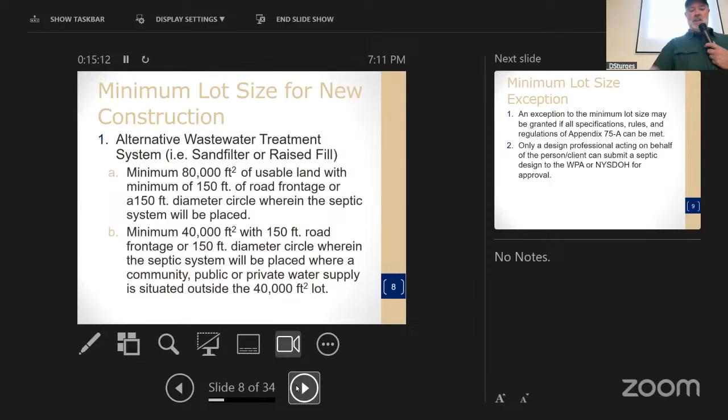The minimum lot size for one of these systems is 80,000 square feet, which is just shy of 2 acres. Say, for instance, you had a water source on the property, like a well. If you have a water source off the property, you don't have to contend with separation from wells, and that's 40,000 square feet.

We also have a minimum lot size exception. So if you can't meet Appendix 75A of the State Sanitary Code, which is basically the rules the state set forth for septic design and regs, and how they're put in, what you can do is hire your own engineer, and if they can meet the 75A standards, then we'll allow the septic to go in.

One thing I'll also mention is, say for instance you had really good perking soil, you could do a conventional septic system, which is like a standard leach field, built with soils like sands and gravels. You have those square footages I mentioned earlier: 40,000 square feet for a well on the property, and 20,000 if you had public water, or a well on an adjacent property.

The replacement septic system sequence is basically the same as new construction, except a lot of times on replacement systems you can't meet all of the 75A standard, meaning separation distance, because there's already existing wells and buildings and so forth. So you do the best with what you have to work with. You try to meet all the separation distances if you can, but typically if you can't, you try to get the septic far enough away from a well. You can also use other alternatives, which I'll talk about in a little bit.

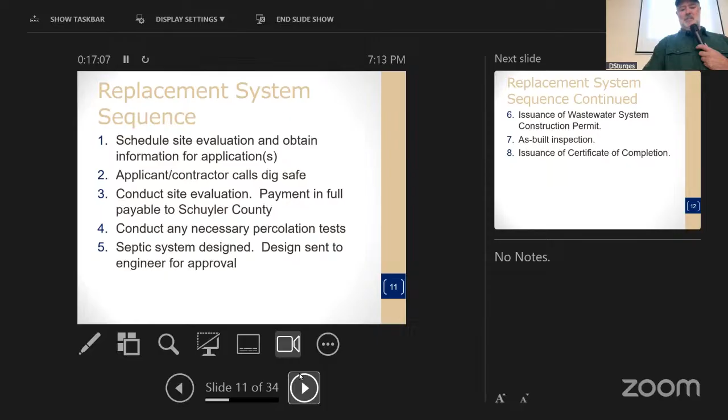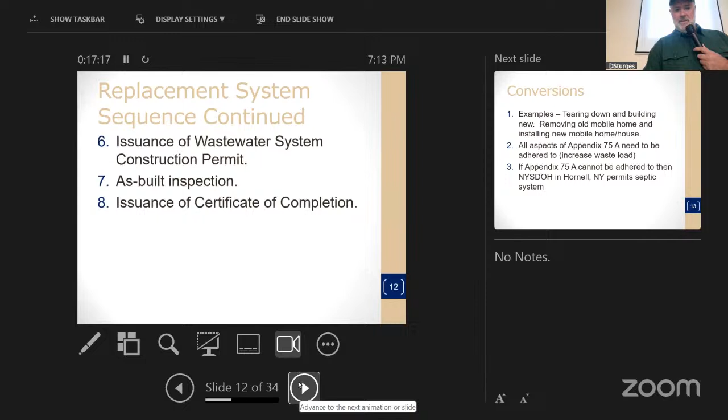So I mentioned earlier, conversions are examples of tearing down a building and building a new place, removing an old mobile home and installing a new mobile home or house. All the aspects of 75A need to be adhered to. If you're increasing the waste load and Appendix 75A cannot be adhered to, then the DOH at Hornell has to permit the septic system. It's out of our hands, we can't permit it.

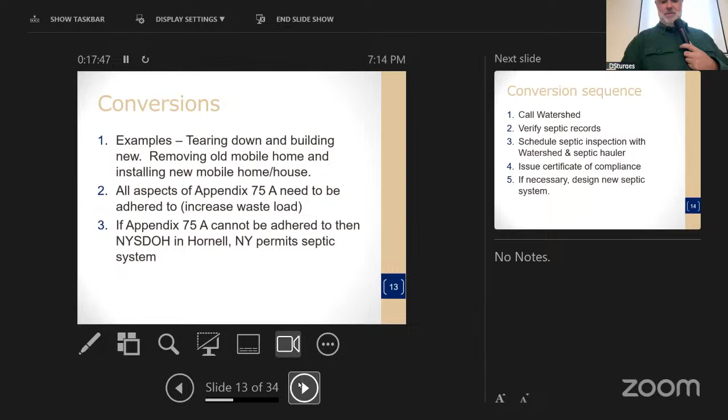Conversion sequences are kind of similar. You call our office, we'll verify the septic records to make sure what's there for the septic system fits their project. So say for instance we designed a 3-bedroom septic system prior to this tear down. It's already existing. If they're putting a new 3-bedroom in, that's like for like, so you're not increasing the waste load, but we do have to inspect that septic to make sure it's functioning.

That's why you get a hold of your septic hauler, and I'll meet them out there to pump the tank out and also look at the septic system to make sure it's functioning okay. Then I'll give a certificate of compliance, and I'll send a copy over to Jason so he knows the septic's good to go for the new building.

So campers and RVs, we get a lot of questions about those. We do allow a holding tank to be put in, for the simple fact that a camper is not considered a permanent structure. If they have it registered through the DMV as a movable object, then we do allow them to have a holding tank, and we permit the holding tank if it's put in the ground, and they have to make sure it's functioning and so forth.

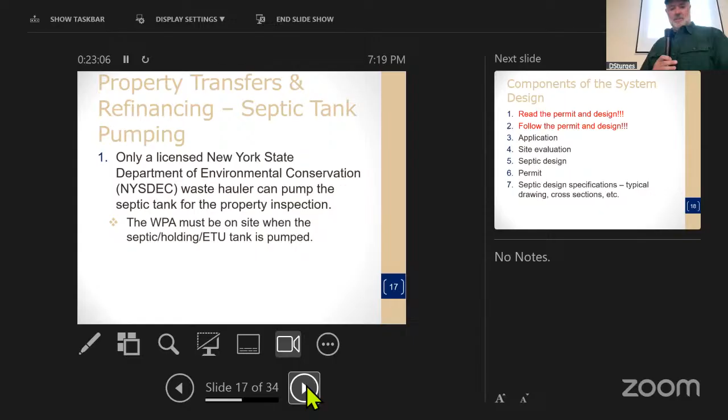So here's some more components of the septic design: read the permit and design, follow the permit and design, the application, site evaluation, septic design, permit, septic design specifications, typical drawings, cross sections. That's all important when the contractor's building it, so they have everything to order the correct materials—sand, fill, pipe, whatever's needed.

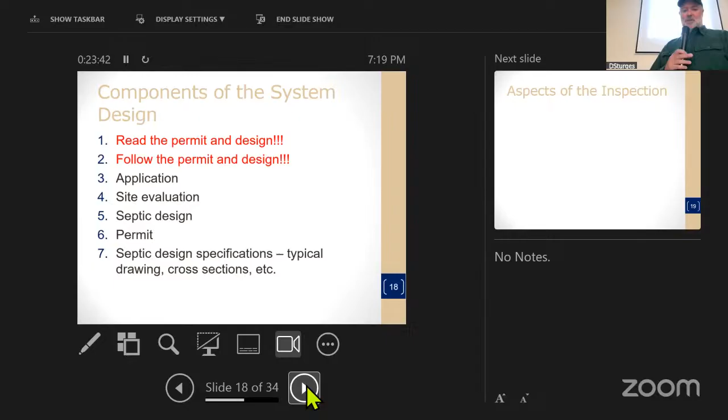Aspects of the inspection: when someone's building a septic system, I like when a lot of contractors give me a call to let me know, put a bug in my ear that they're working on this job. That way I can plan my scheduling—set aside a day or two when they're ready for the inspection. We deal with a lot of contractors, and I've done thousands of septic designs since I've worked here, so there's multiple jobs going on at once.

Also, never cover it over before approval is given. That includes the pipe going from the house to the tank, as well as the perforated pipe in the septic system itself.

Inside a septic tank, the two-chamber tanks we put in nowadays have a wall with a slot cut in it, which helps keep the solids up in the first compartment. The second compartment is mostly water, but there will still be some solids. The effluent filter catches those particles so they don't go out and plug up the septic system—it's basically cheap insurance to help maximize the life of the septic system.

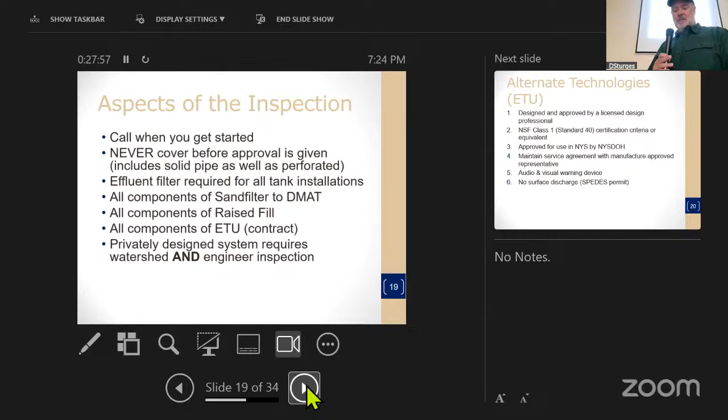Privately designed septic systems require watershed and engineer inspection. If an engineer designs a septic system and sends it to our office, we permit the septic system, but the engineer should go out there and also do an inspection because it's their design. Then they'll send a letter indicating that everything's good to go, and we put it in our file. I also like to go out too, just to get the measurements and so forth, so that way we have two sets of eyes in there.

These are the alternative technology aerobic treatment units. They have different vendors that manufacture these things, and they're rated for gallons per day. Typically, the most common one is like a 500 gallon per day aerobic unit. We use those mainly on restricted lot sizes down close to the water and so forth.

They have to meet NSF Class 1 Standard 40 and be approved by New York State and the New York State DOH. People also have to make sure they have a service agreement with the manufacturer's approved representative to make sure these devices are functioning correctly. There's also audio and visual warning devices on them, and like I mentioned earlier, no surface discharges - that requires a SPDES permit.

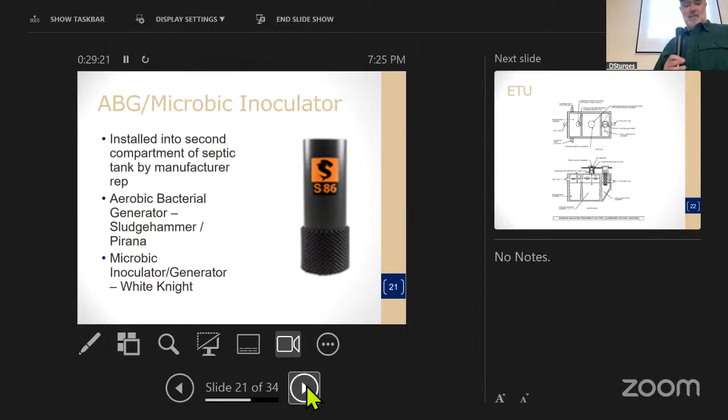Here's an example of one. A couple of manufacturers - there's Pirana and also White Knight. There's other ones too now. Here's an example of the tank, you can see how it's kind of laid out.

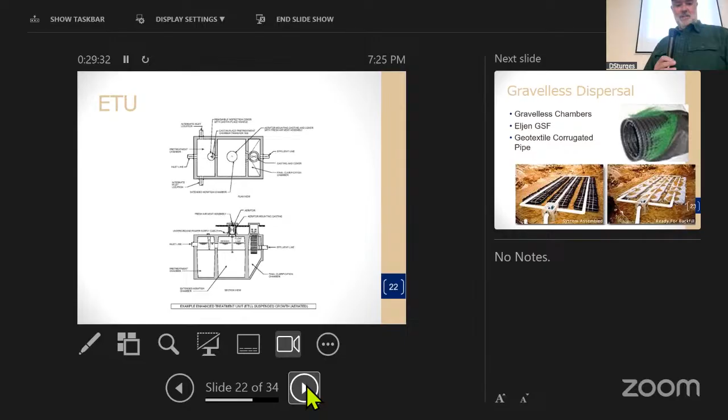These are gravel-less dispersion systems, basically like an enhanced leach field. These mats here, and this round one too does the same thing, just a different shape. They basically provide an area where bacterial growth can flourish and take care of the waste.

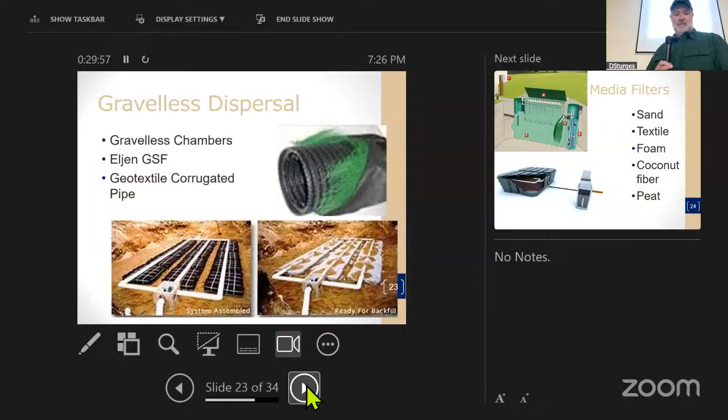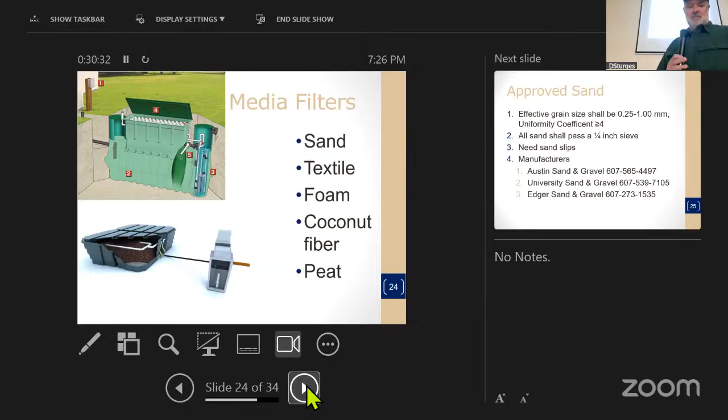Here's some other ones - peat systems. I've only seen one or two put in around here. When you design these septic systems, you have to think about maintenance on them. If you make them too cumbersome, obviously they're more expensive, and also you want to put in a good system, but you don't want to go crazy over-designing things where it could be a maintenance nightmare. So these do work, but they're maintenance intensive.

We talked about sand filters a little bit - you have to use specified sand for these sand filters. You just can't use road control sand. There's certain grain sizes and so forth that need to occur in the sand. Here's some manufacturers of the sand and gravel: Austin's, University, and also Edgars.

Okay, local alternative systems. For the New York State DOH, we had to come up with a boilerplate septic design for poorly drained soil. So we have engineered plans that are typical drawings of these sand filters based on number of bedrooms and so forth. We have to maintain those with the health department to make sure there's no changes with the regulations they dictate.

We have basically three of these designs: sand filter to the downstream modified absorption trench system, raised fill systems we talked about earlier, and also an aerobic unit, an ETU, to a dispersal system, basically a little gravel fill system, or I'll call it a raised fill after the ETU.

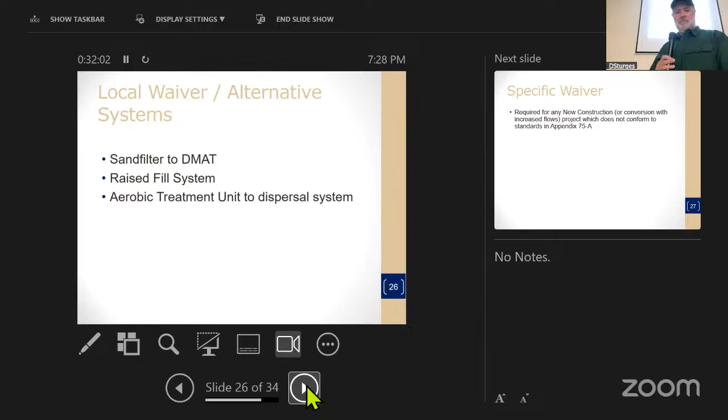Okay, so the waiver is required for any new construction that we talked about earlier. It doesn't fit all the standards of 75-A. You have to make sure you have separation distance, and so forth.

Like I mentioned earlier, we had to go through the DOH over in Hornell. So when we go out there, like any septic design, we have to make sure one of those designs will fit the property, and they always do on new construction.

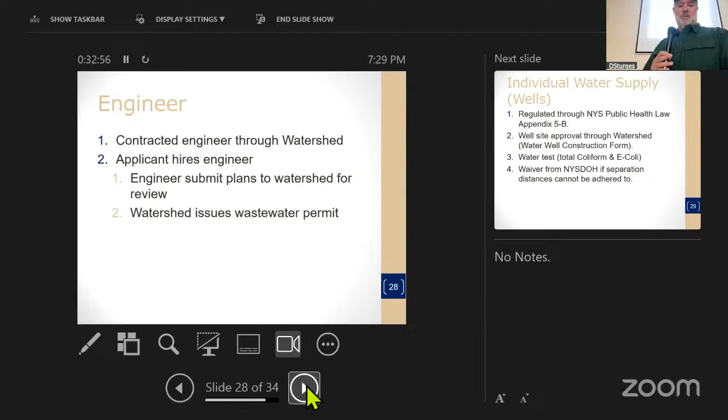I talked about this earlier. We have a contracted engineer for the watershed office, and the engineer submits plans to the watershed for review. The watershed issues the wastewater permit if it's a private engineer sending us plans.

A little bit about water supplies. They're regulated by the Public Health Law Appendix 5B. We have the permit, as I mentioned earlier. When we permit the well site approval, that comes with a water test, total coliform and E. coli, as part of that. Also, when Jason issues his building permit, that's part of the building codes - you have to have potable water for residents, so when they get that, he knows.

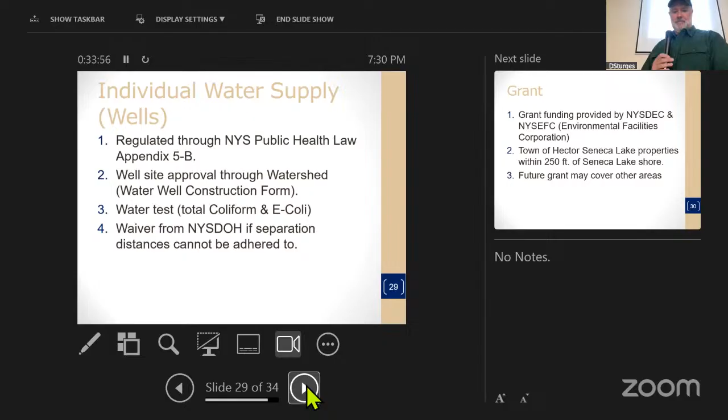And also we talked about the grant. Here in the town of Hector, it's limited to lake properties within 250 feet of the lake shore. In the future, if they have more rounds, maybe they'll change that, don't know, it's up to them. But for now, 250 feet of Seneca Lake, you need a replacement septic system.

You're eligible for funding. How much funding? 50% up to $10,000. So if it costs you 20, you get 10. And that's only for - if you also needed, besides a whole new septic, like a new tank or something, this grant covers that as well. But it's got to be for an existing septic system. It's not for new construction.

Yeah. Yeah, exactly. Yeah, yeah, they did that.

How do you apply for that? We just call our office and we have applications. Then the process, you have to fill out the application, and you have to get three quotes, and whoever is the winner, basically. You put down how much it's going to cost for the project and so forth, then we'll sign off on it. Contractor will build it, we'll go back out there and inspect it. Okay, good to go. Then the county will issue the funding after everything's approved and so forth.

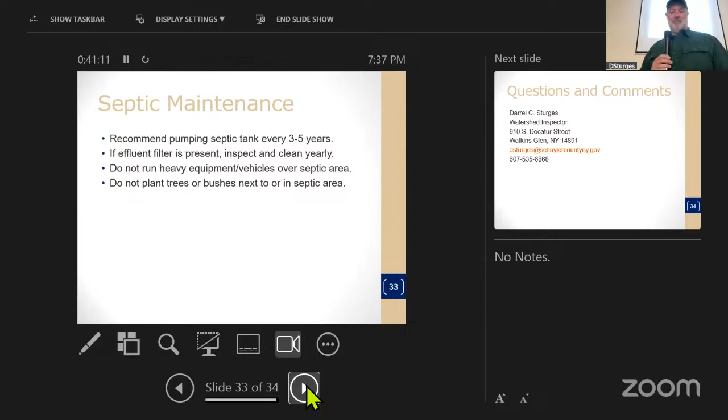Also, do not plant trees or bushes next to or in the septic area. I see that many times, and I cringe when I go by and people are wanting to do it. I warn them every time we do these things, contractors warn them too, don't do it. What happens is the roots get in there, they love the water and nutrients, they plug everything up, and then you're basically ripping out stuff and have to build a new one.

Questions or comments?

How much is the site evaluation for new construction? So if you have a new lot with nothing on it, you need a well and septic system. The septic design - me going out there, the contractor or engineer going out there, my time designing it - that's $850. The well permit is $100 and that gets you the water test too. The permit's good for 1 year, and after that you can renew it, so if you don't build your house within a year, you can renew it. The septic permit is part of that same $850.

You mentioned property transfers and refinancing are only subject to septic tank inspections if the lending institution requires it, or if the parties signing the contract together want it. But basically you could work around that - if you're buying as is and don't want any inspection, then we don't do it. That's kind of a loophole with some fuzzy edges. Anytime there's a property transfer and money changes hands, in my eyes the thing should be inspected. Well, we tried that once before and people didn't want to do it.

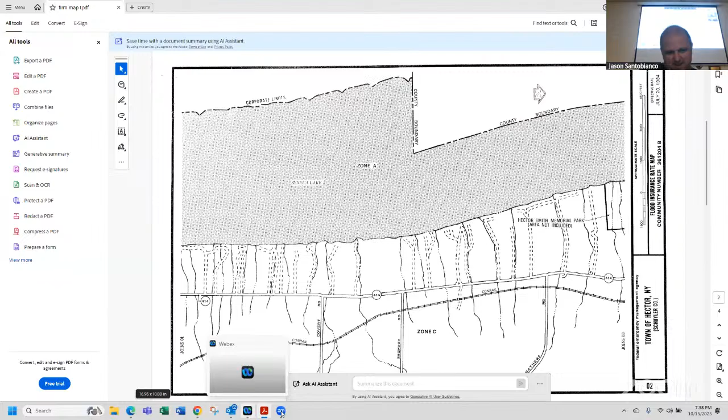All right. Try hitting from current slide and see what happens. That's it, top left. Click it forward and see if... it is. If you go back to share, click escape, and go to share again, see if you can share a different... maybe you share a frozen screen somehow. Okay, I'm gonna... all right. It's at the top now. For some, okay, see it at the top of your screen now. I don't know, okay. All right, I apologize for technical difficulties here. Don't worry about it, and sorry for all the icons on my screen there, that's a very busy desktop. All right, let's see if this works. That's better, yeah, okay.

Great, all right, that seems better on my end too, so. All right, fancy, good, too.

All right, so like we said, protect public health and safety, encourage voluntary compliance, and support informed decision-making. So I just talked a little bit about community engagement, but we really want to be here to support our community. We don't want to be adversaries. I know sometimes code enforcement is the least liked person in the county, except for around assessment time.

So we like to work with our contractors. We don't want to make anyone feel silly for a question, no matter what it is. Don't be afraid to reach out.